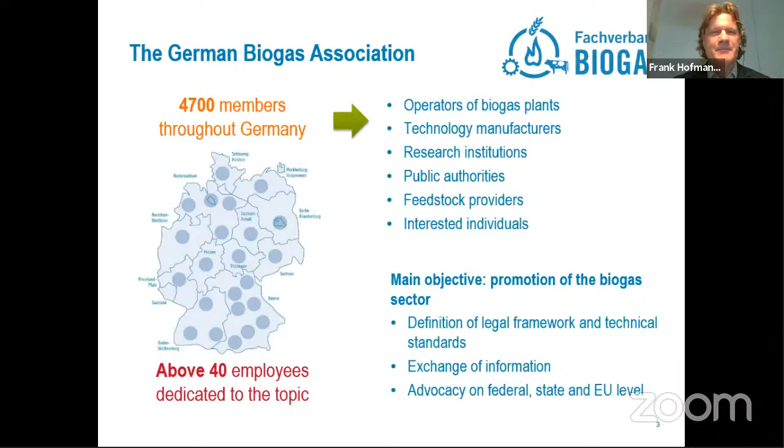I hope that we were quite successful in the past and will be in the future as well. We have an international department with about 6 persons working on international projects. Probably you know some of these organizations, for example GIZ, UNIDO, and before that there was SEQA mentioned, so we are working with all of them.

By the way, association partnership, we are very active in that. We had an association partnership with the Indian Biogas Association, with the Serbian Association, and as of today, the 1st of December, we have an association partnership with the Biogas Association in Uganda. So we are very active on that. But as it was mentioned before, I don't know exactly how active SEQA is in Latin America. But if you are interested, write me an email and then we can check that.

That's the biogas status quo and development. We thought to find out how many biogas installations are installed worldwide. By biogas installation, I must explain, I'm not talking about domestic biogas plants, so not small household biogas plants. I'm talking about the bigger size plants, industrial size biogas plants, or on agricultural level.

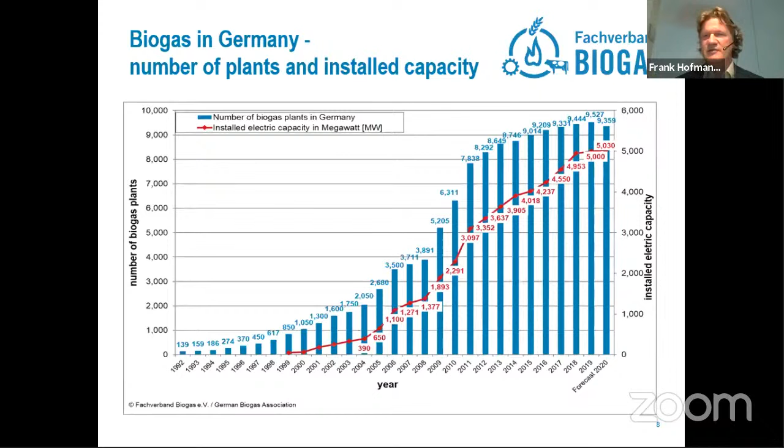It's a state-of-the-art technology. Some rough figures - I don't have time to go into all details, but what might be interesting for policymakers and society: according to official calculations in Germany, the biogas sector helps reduce about 20 million tons of CO2 emissions. Not only helps, it causes 20 million less CO2 emissions.

There's a turnover of 8.8 billion euros, which is important for policymakers as well. And job creation in the biogas sector is about 46,000 people. Again, a very strong argument for policymakers to think about the incentive system or support system for biogas. Biogas is a job creator, and the jobs are mainly in rural areas.

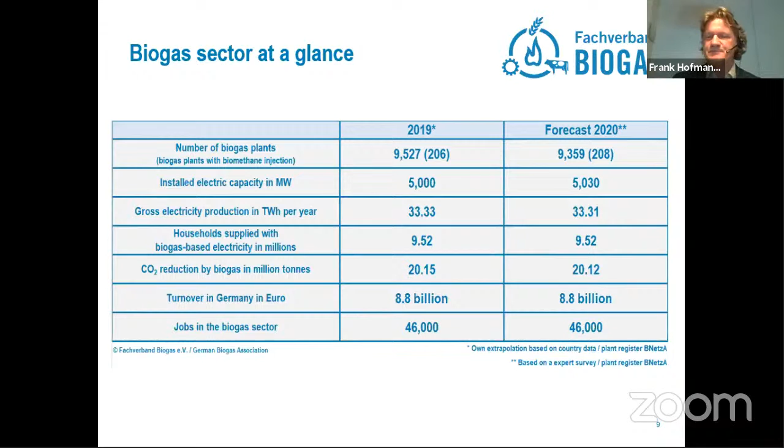Several kinds of feedstocks are usually collected. These feedstocks can be from agriculture, can be industrial feedstocks, household organic materials, from agriculture. So there are several kinds of materials that can first be collected, prepared a little bit, then pumped or transported into the main digester system.

That's usually a big tank of concrete or steel where the biogas is produced and stored typically inside the biogas plant. The biogas itself is the fuel for the renewable energy that is very often used in a gas engine to produce electricity and heat. And here it comes to the point that it's not only electricity, it's additional heat production.

Biogas can be burned directly in a boiler to produce process heat, but combination with a gas engine is typically the most common way it is done. Biogas itself could even be upgraded to natural gas quality. Then it's called biomethane. In natural gas quality, it can be used as fuel or injected into the gas grid.

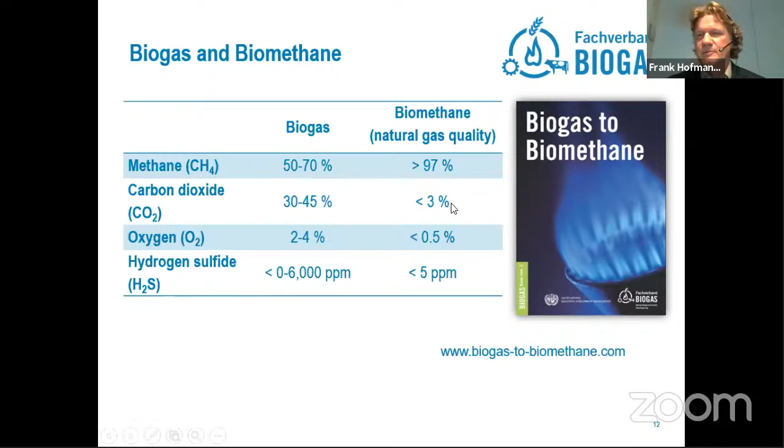The next topic where biogas is important is biowaste. In Latin America, I think waste treatment is an important topic in many countries because in former times the typical way to deal with waste was landfilling. But landfills, we all probably know, are connected with several problems or challenges.

One is methane emissions from the landfills. There are even some fires on landfills - you could imagine how much methane would emit from that. And methane is much more potent as a greenhouse gas compared to CO2. Several studies about that - maybe factor 25, 30 in this range, depending on the time frame. Anyhow, these methane emissions have a huge contribution to climate change.

Landfills have sanitization problems if people go there and try to sort out some materials that they might use. There's loss of nutrients because the nutrients are not recycled, and we have no energy generation.

What's the future way to deal with biowaste? Well, one point is composting - here we have material recycling, but no energy production. There's incineration possible - here we have energetic use of the material, but typically the ashes cannot be used as fertilizer because there might be heavy metals or other problems in there. So the ashes typically have to be dumped in landfills.

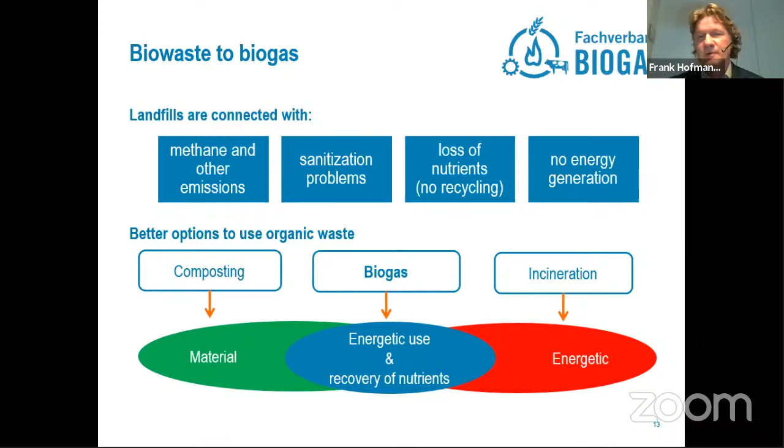Biogas can offer both energetic use - biogas production - and recovering of nutrients with fertilizer. And that's why biogas should have an important role in waste treatment.

By the way, I'm living in the city of Berlin. Here we have separated households with a brown bin or green bin, which is transported by the trucks that collect the waste to a biogas plant.

The biogas is produced, upgraded to biomethane, and the trucks collecting the waste are operated with fuel from the waste they collected. So we have two closed recycling loops: one is the recycling of material to fertilizer, and the other is taking energy from the waste to drive the trucks that collect the waste.

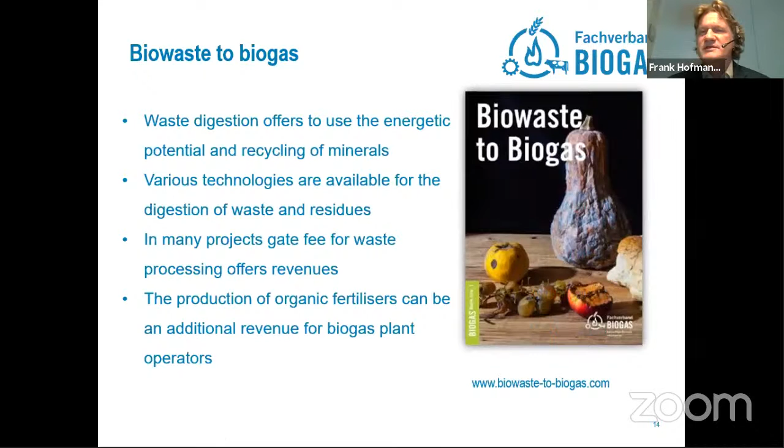There are several technologies available on the market. Again, if you're interested to get more details, we produced a brochure that might be interesting for you.

We already heard several points about grid stability today. Mr. Krauter said something about that, as did some other presenters. To make it short and focus on biogas, we had 20% renewable energy in the system.

So we will have another presentation about storage. I want to say here that in Germany, for example, we have 9,500 biogas plants. Each of them has a storage tank, and most of them—nearly or at least half—are in flexible operation, so they can produce electricity on demand if the electricity grid provider needs more electricity.

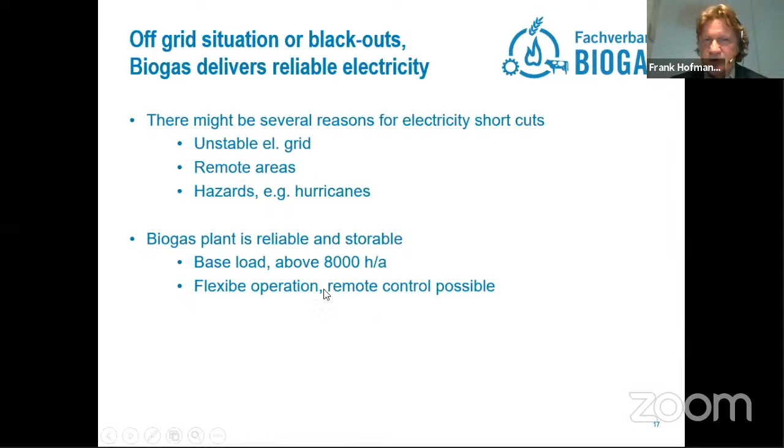This brings me to the last point of advantages of biogas. We already mentioned the greenhouse gas effect and climate change. It's a huge challenge, probably the biggest challenge of mankind. The role of biogas in this topic is a little bit special.

The most important factor of a biogas plant is probably the avoidance of uncontrolled methane emissions from open-air storages of organic material. What does this mean? In Europe it's very obvious, and for Germany it's a huge motivation to support biogas plants, because if manure is stored in agriculture, there will be huge methane emissions, which is true for Latin America as well.

In Latin America there's an additional point: industrial production of organic material and open lagoons. There are huge and many open lagoons in Latin America. You could imagine that only on the surface, the upper 5 or maybe 10 centimeters, will there be some oxygen. All the other parts of the lagoon will be free of oxygen, which means it is a form of biogas plant—there are huge methane emissions.

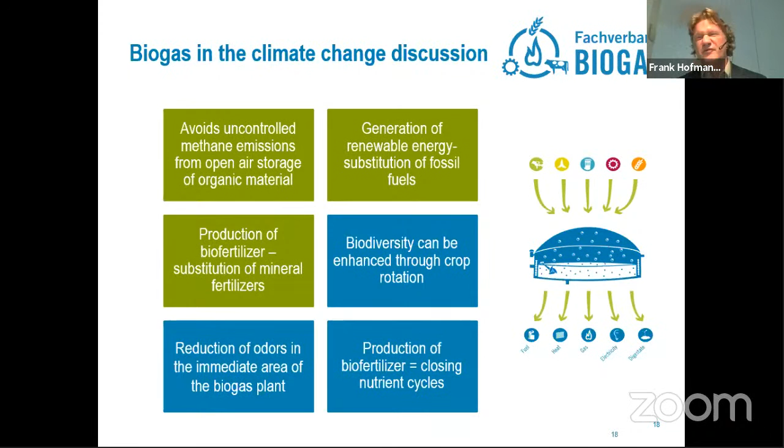Having said that, I would like to come to the end of this presentation with the summary.

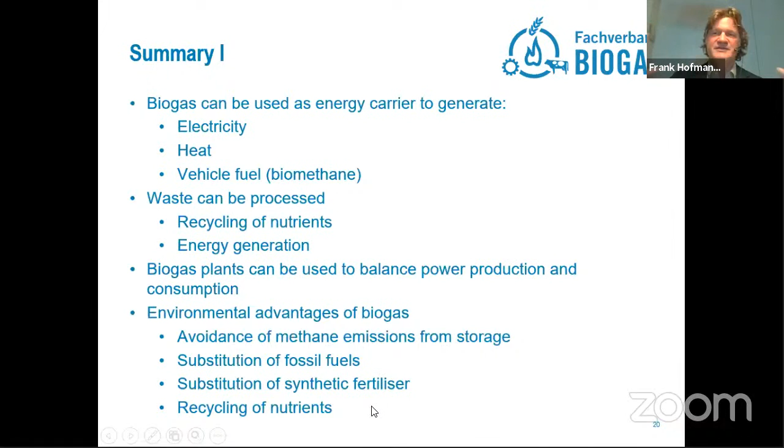Biogas can be used as an energy carrier to generate electricity, heat, and even vehicle fuel, which is somehow seldom in renewable energies. Waste is processed, recycling nutrients while generating energy. Biogas plants can balance power production and consumption, and there are huge environmental advantages: avoidance of methane emissions from storage, substitution of fossil fuels, substitution of synthetic fertilizers, and recycling of nutrients.

In Germany, we have about 9,500 biogas plants in operation, with experience since decades, so it's an approved state-of-the-art technology. If you're interested in more information, we have several publications, including two English biogas journals per year, covering topics like transferring waste to biogas, biogas to biomethane, and how to use the digestate. Safety is becoming more and more important in the world, because with development of the sector there might be a correlation with accidents that must be avoided. That's why safety and standards will be getting more important in the future.

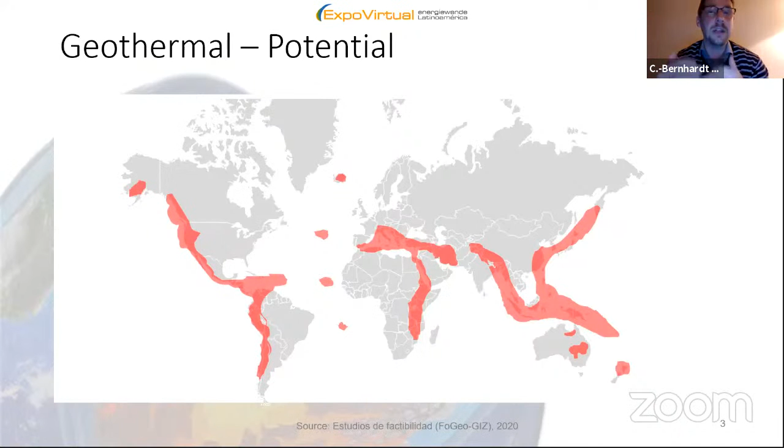Most of you know this map, I think. This is the so-called Ring of Fire. We've got a lot of seismic activity in Central and South America, so you can see here a lot of, especially in Central America, volcanoes and active volcanoes. So you see that all around the world there are some areas where you can use geothermal really easily - you can put some applications there. I picked a very famous but little country in Central America, Costa Rica. I lived there for more than 10 years, and you can see it here really well - it's well established, with a lot of analysis and a lot of data on how geothermal works in Costa Rica.

A lot of people don't know that Costa Rica has a lot of geothermal plants for electricity generation, more than 260 megawatts installed capacity, because they have more than 120 volcanoes and 10 are still active. So imagine you are there in Costa Rica on vacation, near the Arenal volcano.

You can see it here. There's a lake, a big hydro plant, and beside the lake there is the volcano Arenal. I remember when there was a little lava flow coming out at night. It's a bit romantic, but it also shows us the potential in this little country, and not all Latin America, but in most countries in Central and South America, you have really good conditions, or the best conditions, for indirect and direct use of geothermal.

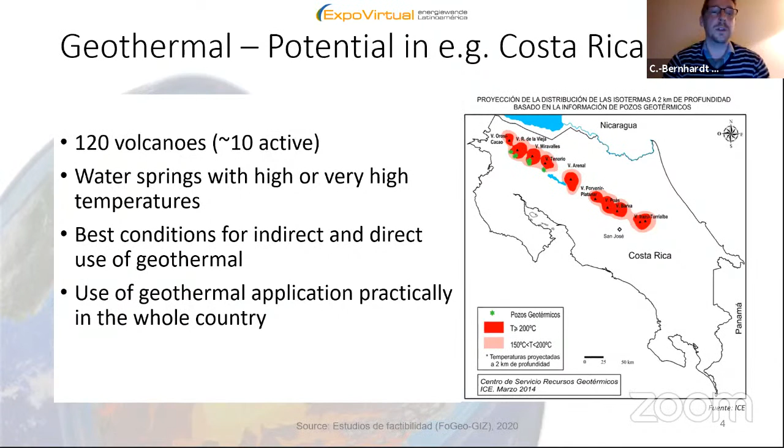This is a theme I will talk about later. Indirect use, what I mentioned, there are a lot of geothermal power plants, but my presentation will dedicate a little bit more to direct use of geothermal. So this is only for people who don't know, there's a lot of information about geothermal potential in Costa Rica. Long time ago, the ICE, the monopolist, started to investigate this kind of energy source, and it is used a lot there.

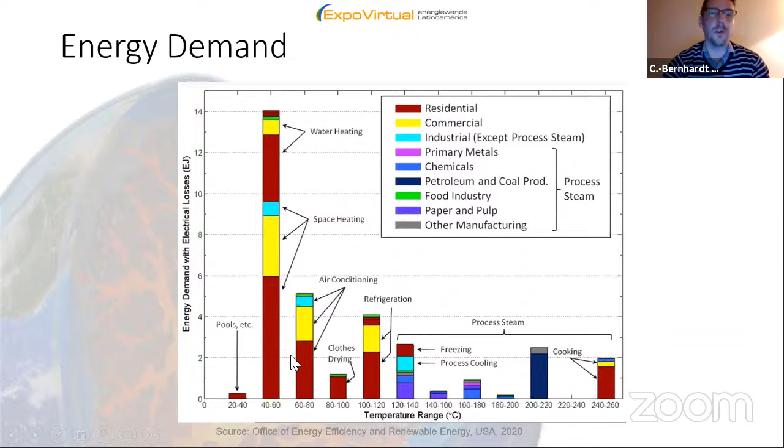So for example, the residential sector uses a lot of energy for heating water or space heating, but also air conditioning and refrigeration, and this is what is of more interest in Central and South America. Important here, if you see on the x-axis, the temperatures where we need our energy: it's between 20 for pool heating, maybe 120 for refrigeration. But I will come to this point a little bit later. Normally, you see here the most energy demand is between 40 and 60 degrees Celsius.

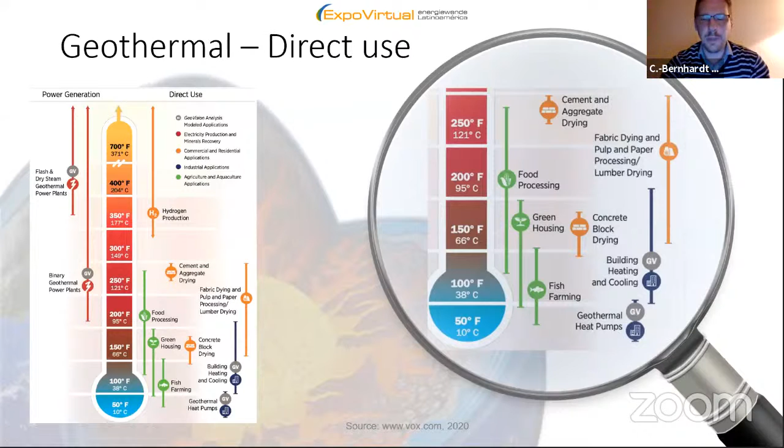And there's a big question. So, if I can use geothermal in a direct way, go back here, geothermal heat pumps for example. We have the Bundesverband Wärmepumpe, the Federal Heat Pump Association in Germany. So if you talk about it, how can it be that we have in Germany more than 1 million installed heat pumps today, and how many do we have in Central America? Zero. I think there's a big lack. The question is, maybe it doesn't work, or there is no need, or what happens here?

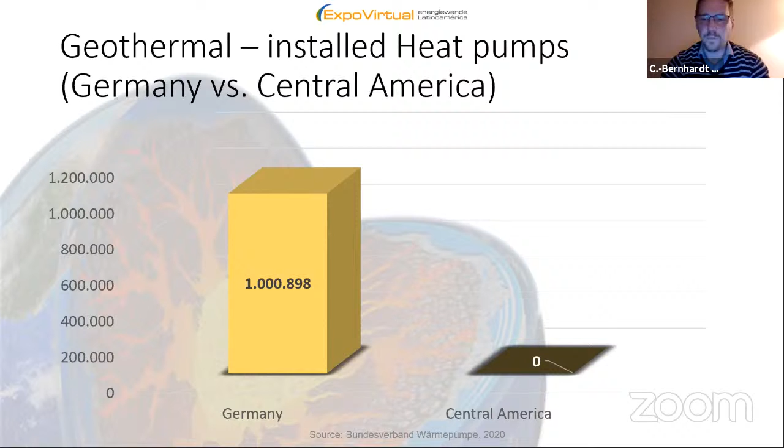I think, yes, there is a need, because you can make cooling, and I showed you in the examples with heat pumps, it's a major technology. You have a lot of applications for it, and there are some examples in South America, but until now, no example in Central America. So what are my projections? For the next 10 years, to have a little vision of where we can go with geothermal applications, especially heat pumps, in the next 10 years, I think we can achieve more than 1,000 installations.

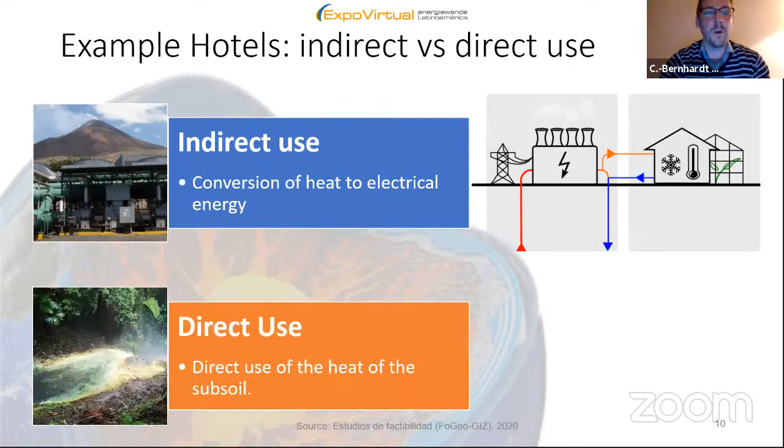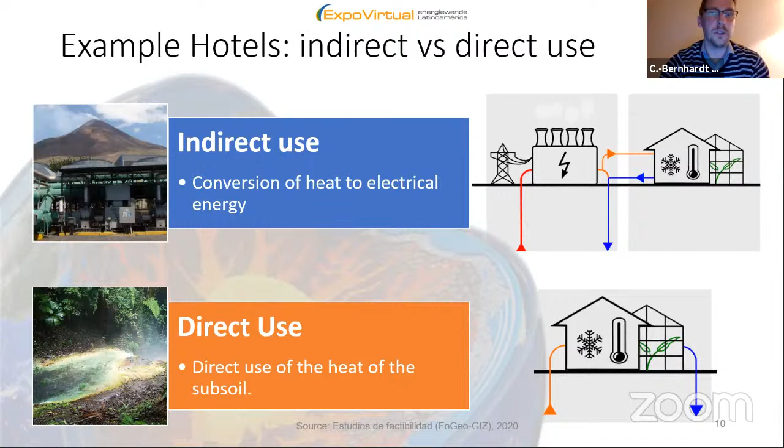So next, some ideas how you can use geothermal applications in hotels. Indirect use, we talked about it, from heat to electricity, or the direct use, especially using the heat of the subsoil for certain energy needs in your hotel.

Also, where's the biggest energy demand in a hotel? Normally, it's from the air conditioning in Central America and also in South America. Sometimes it's up to 40% of the whole energy demand, and what you are paying monthly, so the energy is dedicated to air conditioning.

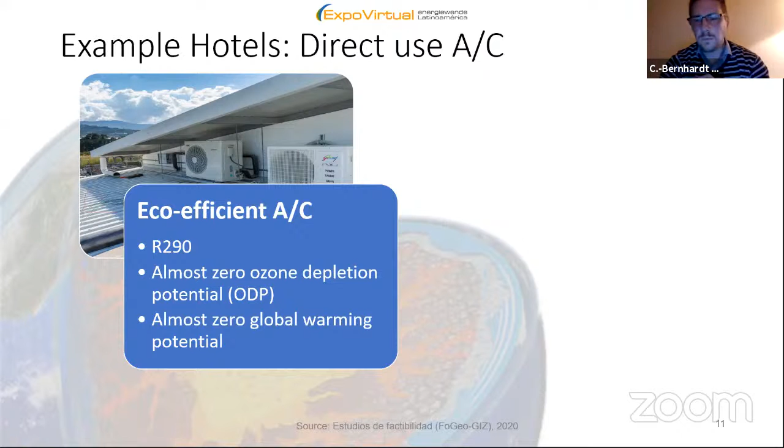There's also the possibility to replace it, to make a change, to use only the electricity you're used to, and use a heat pump with inverse technology. Then it works like a refrigerator, so you can use geothermal energy also for cooling.

Here are some other examples for hotels with direct use, for example in a sauna or other wellness and health applications in a hotel. Here you need a bit more temperature, maybe 70 to 90 degrees. Where you need higher temperatures, it's easier to recover your investment in a geothermal application.

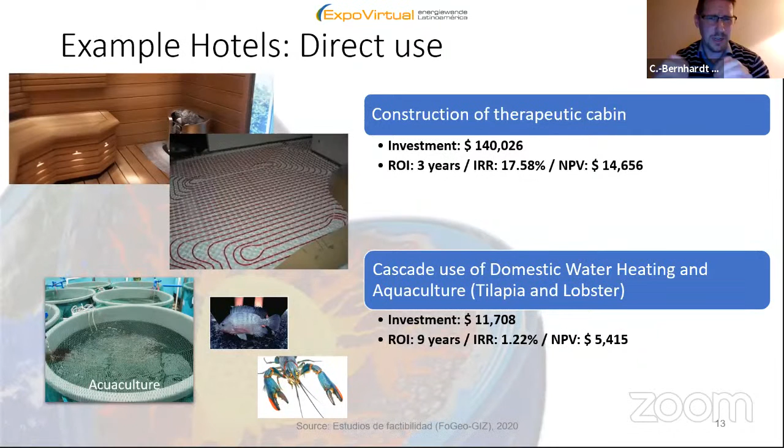It's just some pictures. If you take such a therapeutic cabin, a sauna, maybe an investment of $140,000, you get a return on investment in more or less 3 years. This is really easy because of the high temperatures you need here.

Another application I want to show you is greenhousing. We are really used to it here in Europe - you see it in the Netherlands, in Germany, in Turkey. This is an example from Turkey, where the heating of the greenhouse is also done by a geothermal application.

What does it mean, or why should I do this? Of course it helps me be more efficient. It's cheaper, and I can grow my plants more or less the whole year, so I'm independent of outside weather conditions. I've got a more secure and efficient environment for my plants.

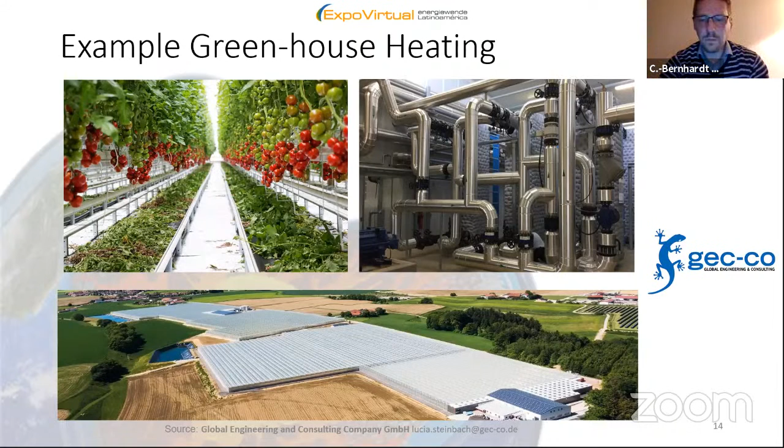Another option I mentioned before is cooling of buildings. There's a big market opportunity for Central America. If you use groundwater and heat pump technology, you can use it for your AC. I'm thinking, for example, about Panama - Panama is like a big fridge, it's on sea level, Panama City is a city on sea level, it's really hot there the whole year, and they use air conditioning 24/7.

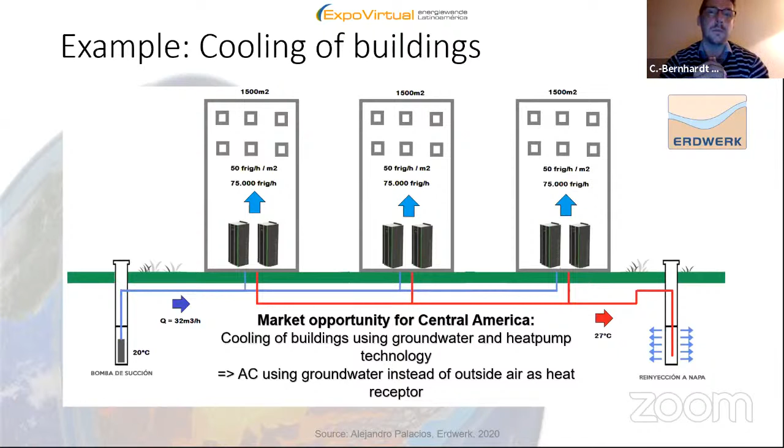Here's an option you could use to replace your normal ACs, maybe together with heat pump technology, another cooling option. What does it mean?

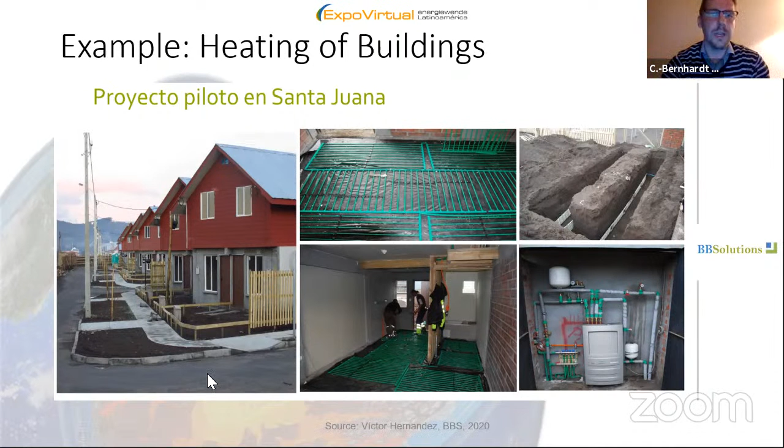Another example of heating buildings, which we know very well here in Germany, but this example is from Chile. A few years ago they installed a really nice system for a social housing or living area. The heat pump works really well, and you can see there is a lot of gain in efficiency using a heat pump and geothermal application for heating a building.

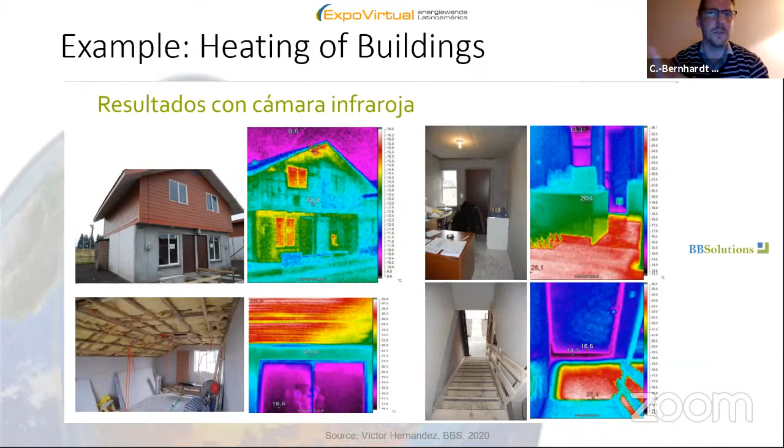We have got 1 million heat pumps installed in Germany. Why is there none in Central America? I think there's a lack of ideas and knowledge, but later on I will tell you a little more about why this happened.

Last but not least, there are some real examples of geothermal application in South America - for example, heating a pool at a Navy base, also greenhouses as I mentioned before, or fish farming. And of course, in whole food factories they need a lot of energy, a lot of heat, hot water - there are already companies using geothermal in their production.

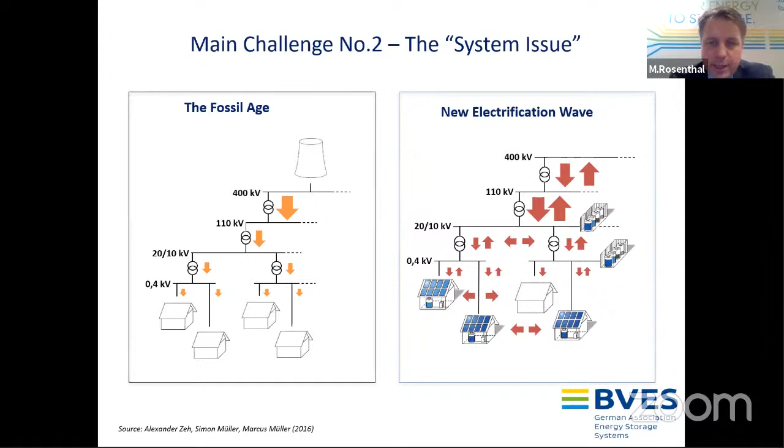And energy storage starts to play a huge role, because we recently had a tweet from our minister for energy who said the sun is not shining in the night - unfortunately we saw it a bit too late, otherwise we would have replied. But you can have energy storage in the night, and that is, of course, the new thing which is now happening.

In the fossil age, energy was sufficient. You needed energy, and then you could drive a car, use the heating, produce goods in the industry. What we need now in the new energy world is power.

That's always a slightly tricky word. Those coming from an energy background know exactly what it means. For those who don't have this background, power means that the energy is available when it is needed. For instance, if you have an electric car and you want to load it, if you have power in the sense we mean here, this car will be charged within 15 minutes, and then it will be full.

One of our members is BP, which you possibly know from other cars and petrol stations, but BP is now the big name in the ultra speed charging sector, and they produce exactly those charging stations which allow you to charge your car within 15 minutes. And that's a new thing - the energy is there, available when it is needed.

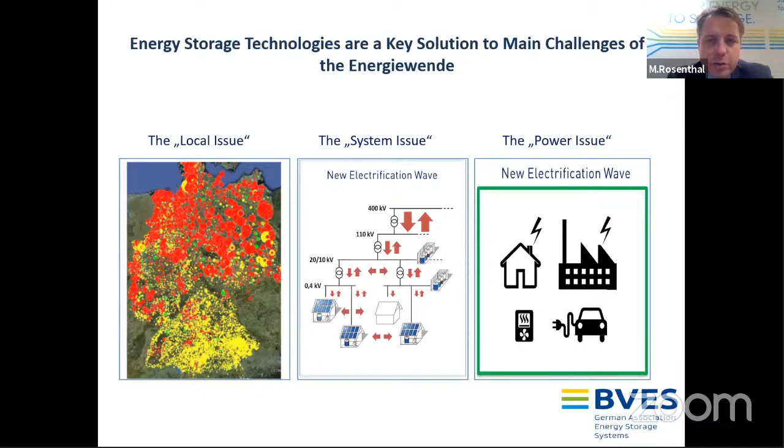So this is a summary of what I talked about. We have the local issues, the systemic issues, and the power issues, which are all changing. And now I come to our favorite picture.

So if you, for instance, want to increase your energy efficiency in terms of always having a proper frequency, then you use energy storage. That's a tool to secure that your energy efficiency and frequency control is always stable. And that's how it works.

We do have some debates with our national government about what energy storage should and could be doing. Our government has a very limited approach to energy storage. What's interesting is because we have a multi-level governance system, and the European Union is pooling the power of now 27 member states - Britain is still part of it, so it's 28, but that's going to end this year - at the EU level, there's a very clear policy saying energy storage is key for cost-effective security of supply.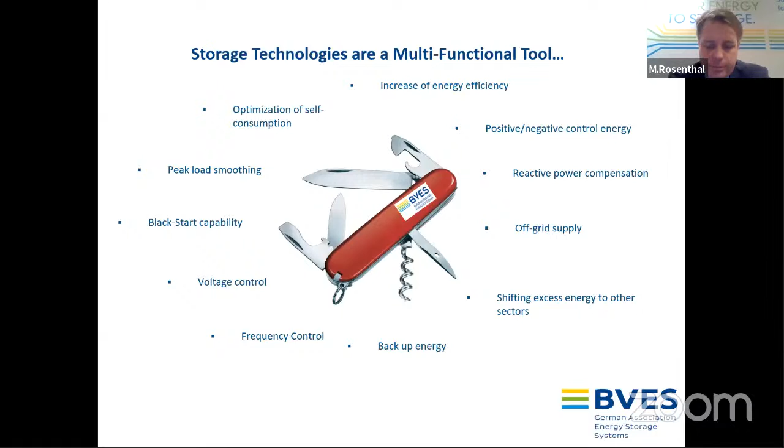But the main pillars are lithium ion. We know this from car batteries or electric vehicles, quite common. You possibly also know it from your mobile phone. That's also what our politicians understand - that's a special way of energy storage.

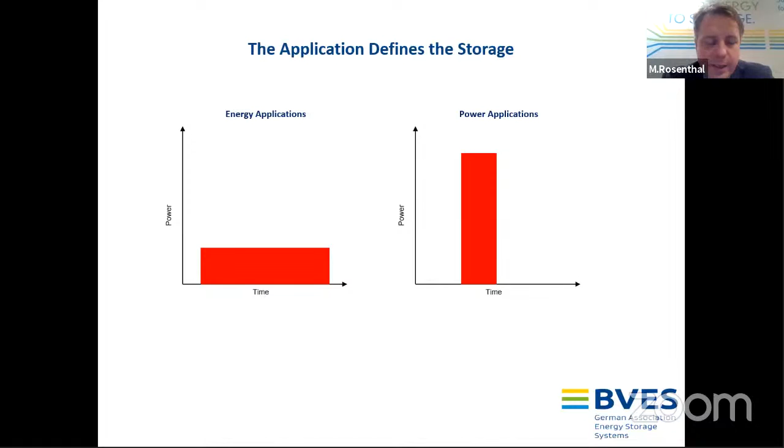And the key message is that there is a huge flexibility - you can use whatever technology is helpful for you. So now we go to the current trends and developments. I also mentioned a few of the technologies - these are nice, lovely pictures of how it could be, how it could look like.

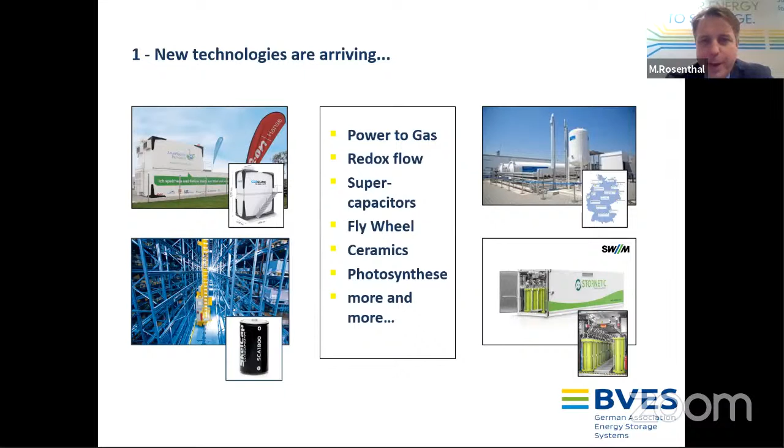What we're seeing nowadays, and I think this is a nice picture illustrating, is that the combination of technologies is very common, and you also have cross-sectoral integration. So the car could be used, for instance, if there's still energy in the car and you come home with it, you can plug it into the household plug, and then use the energy from the car for the house.

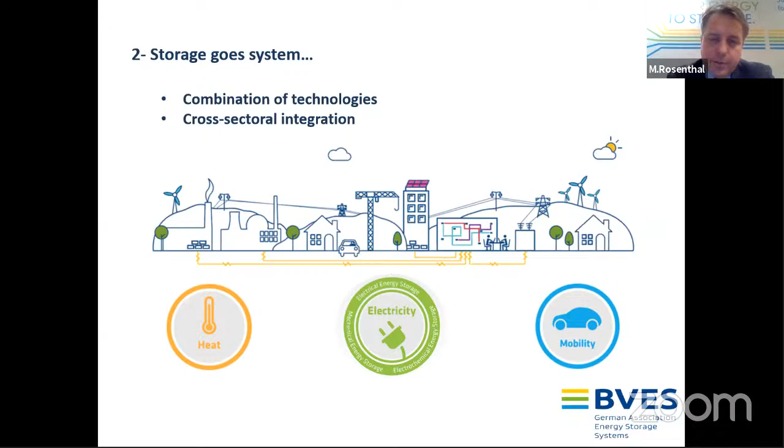Some of you may think that doesn't really sound feasible, but the car industry - we are in talks with BMW and Daimler - is very focused on it because they see the potential of a new market for cars in terms of not only taking energy, but also acting as a rolling battery, which charges, for instance, at the workplace, and then you use the remaining energy for your home. So this is the new world where everything is interplaying, and it's a slightly better world than what we have now in terms of energy.

This picture was drawn by my colleague, an engineer who is very focused on getting things right. What I like about this slide is it gives a clear message about electricity from renewable energy in future being used for power to heat. So heating will be based on electricity, and also mobility will be based on electricity. This also means hydrogen is going to be used, and hydrogen is also going to be dependent on electricity. What I find important is it doesn't need to be electricity when it comes to the final user, it can also be gas, which comes to the final user, and he can use what he needs. But electricity is definitely, from our point of view, the key for the whole system, or for the change in the whole system.

I just want to add a few words about the German regulatory environment I mentioned at the beginning. I don't want to bore you too much, but we did an opinion poll amongst our members, and 86% of them say the regulatory framework is stopping our business. The reason is the German government, unfortunately not alone in Europe, but as the leading nation in this area, is defining energy storage as a form of last usage of power.

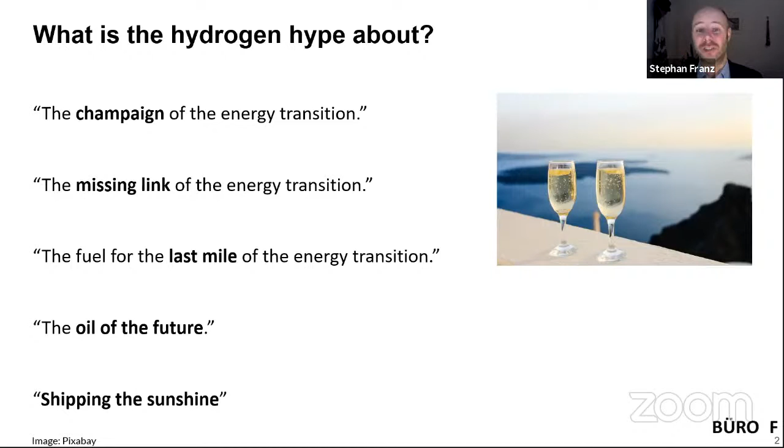So let's start with a basic introduction to hydrogen. It's very basic, we all know it from chemistry classes. It is the lightest element in the periodic table. It is here on the upper left, the first element.

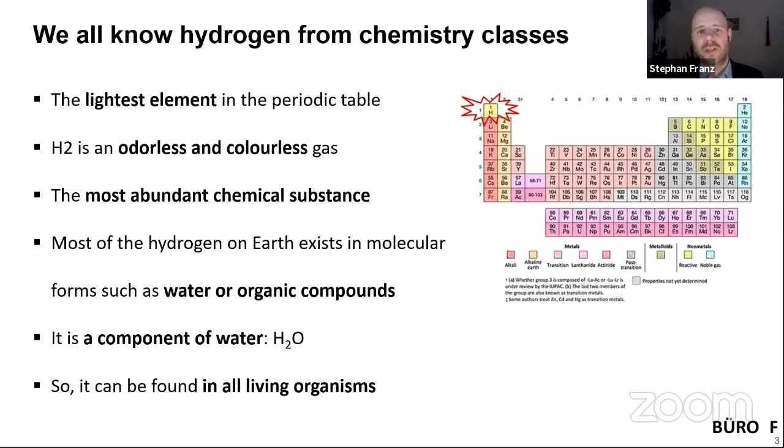It is an odorless and colorless gas and the most abundant chemical substance in the universe, not in the Earth's crust. Here it can be found in compounds. And this is important: hydrogen is always found in composites, in compounds, like water, which is hydrogen plus oxygen. So it can be found in all living organisms, it's nature.

It is already used as gray hydrogen, which I will explain on the next slide, in the chemical industry for producing ammonia, polymers, and other basic materials, in the petrochemical industry, in refineries for hydrocracking, and in other industrial segments as well, for example for producing glass.

World demand in 2015, and it has grown a little bit but it's basically the same figure for 2020, was about 8 exajoules and 2,200 terawatt hours. Just for comparison, the German power market, the electricity generation of Germany, is about 600 terawatt hours. So it's, let's say, 3 to 4 times the power market of Germany.

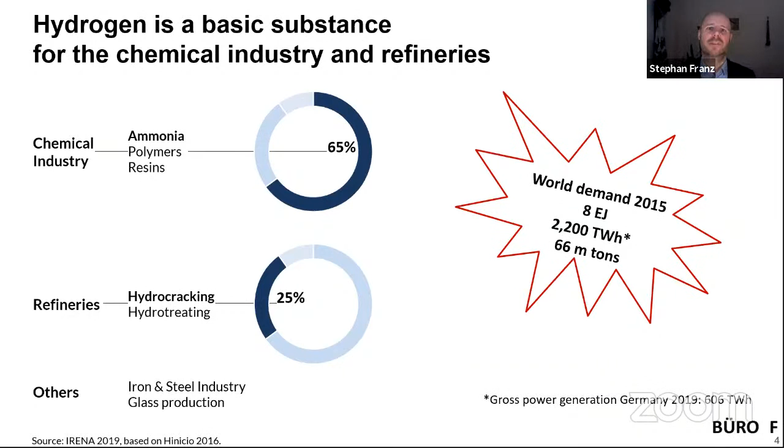So there is a substantial world market for hydrogen already, which is covered by gray hydrogen. Gray hydrogen is produced by a steam methane reformation process using methane. This is the most common way to produce hydrogen nowadays. Another way could be using petroleum, or petrol, oil, and coal as well.

So the magic is green hydrogen now. With the costs having come down, or lowered cost for wind power production and photovoltaic production, the idea is to use electrolysis to separate oxygen and hydrogen from water molecules. So you need renewable electricity — to make it green hydrogen, it should be renewable electricity used to produce hydrogen and oxygen, and there is some process heat that could be used as well. So this is the magic of wind gas, of green gas — not only decarbonizing the power sector, but also decarbonizing all energy sectors.

Green hydrogen is a niche market at the moment. Only 4% of global hydrogen demand is covered through green hydrogen, and it's much more expensive right now. Gray hydrogen costs around €1.50 per kilogram, and green hydrogen is between 5 to 7 euros per kilogram right now in Europe. In Chile, they expect to have the cheapest hydrogen in the world by 2030, reaching the €1.50 range — which would be very good news — between 1.3 to 1.8 US dollars per kilogram by 2030. This is one of the objectives of the Chilean hydrogen strategy. So we see, if there is competitiveness of green hydrogen to conventional hydrogen, there is already a market.

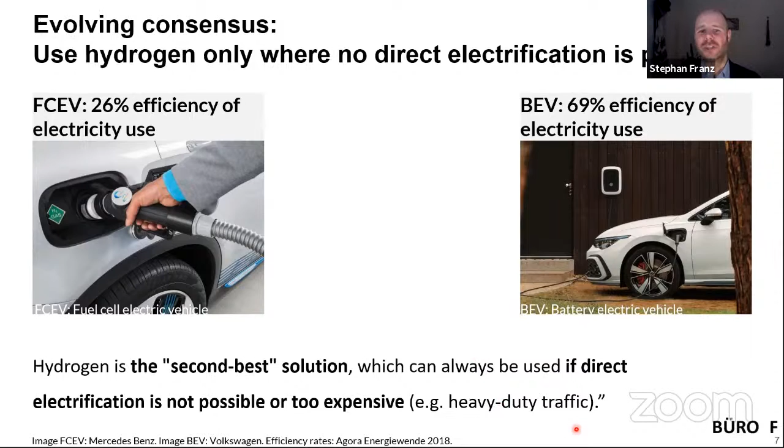So in the end, we have, for example, for a fuel cell electric vehicle, an efficiency of 26% from the kilowatt hour of generated wind power or photovoltaic power to the moving wheel of the vehicle. And in battery electric vehicles, BEV, it's 69% — from well to wheel, meaning from generation to final use in the fossil world. So there is no case for an efficient, energy-efficient use of fuel cell electric vehicles. Sorry to say this, but lithium-ion is much better. But then in heavy duty traffic, there might be business cases for hydrogen. So where do we need green hydrogen?

First, it's obvious: decarbonize the existing hydrogen demand, ammonia production, usage in refineries. This is where all the strategies are targeting right now. This will be the first use case for green hydrogen.

There's a lot of talk about new industrial production processes here in Germany, especially in the steel industry - direct reduction instead of blast furnace. This is a very relevant sector here in Germany because the steel industry makes up some 6 to 7% of German greenhouse gas emissions. So why not start with the 4 or 5 companies and make their production process cleaner with green hydrogen?

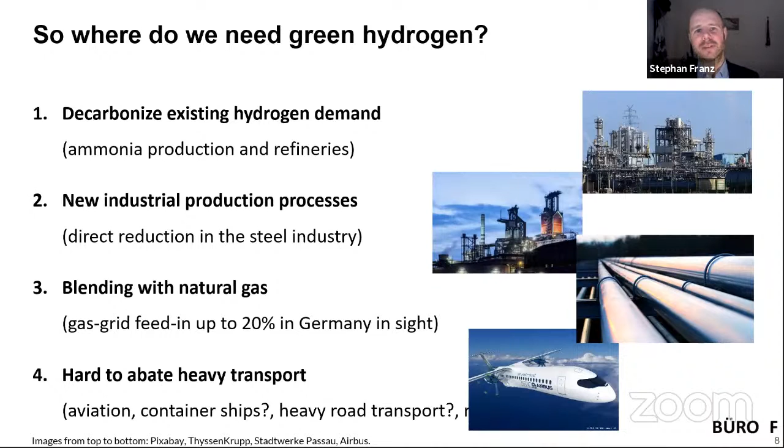Blending with natural gas would be another option to feed green hydrogen into the existing natural gas infrastructure. Then comes the transport sector, the hard to abate heavy transport - aviation, maybe container ships, maybe heavy road transport. Airbus announced it will come out with a hydrogen or zero emission airplane by 2035. This is a very interesting segment because we don't know how to decarbonize the aviation sector, and this is where hydrogen comes in. Big industry and then big transport, but not the fuel cell electric vehicle passenger car - this is for playing right now.

And of course, for large scale storage in the power sector - we had the presentation of Mr. Rosenthal previously. Lithium-based batteries are good for storing seconds, minutes, hours, maybe days. The largest battery right now is, I think, in Australia, 120 megawatt hours of storage capacity - a big lithium-ion battery storage. However, for months and weeks, hydrogen comes in.

If you need it - we have dark doldrums here in Germany where there's no sunshine, no wind for 1-2 weeks. So an energy system, a power system highly dependent on intermittent renewable energies requires some backup, which could be hydrogen for the dark winter months that we are experiencing here. So this is another use case for hydrogen, maybe in the power sector. But we should start with decarbonizing existing hydrogen demand, inventing or using new production processes, and then go to the transport sector and maybe the power sector.

And there are a lot of opportunities, especially for Latin America, I would say. There are some initiatives already going on - I mentioned the Chilean hydrogen strategy already. There are 2 projects already in development in Chile, one in the south.

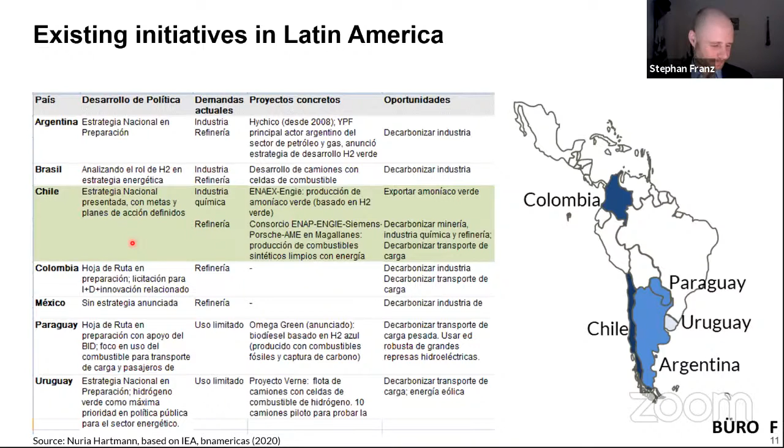Coming back to Chile, the recently published hydrogen strategy focuses on the production of ammonia and the usage of green hydrogen in oil refineries in the coming years. But in the long run, Chile wants to export ammonia and hydrogen, and this is the big market: first decarbonize existing hydrogen demand, and then look where to export hydrogen and its following products like ammonia, like synthetic fuels in the coming future.

However, we saw the cost of green hydrogen in the beginning. So I think it is important to be realistic and say, okay, maybe an international hydrogen market might evolve from 2030 on. Right now is the time to bring down the cost. Right now is maybe like the 1990s - the 20s might become what the 1990s were for photovoltaics and maybe wind power. So we are in the phase of bringing down costs and identifying good use cases for green hydrogen.

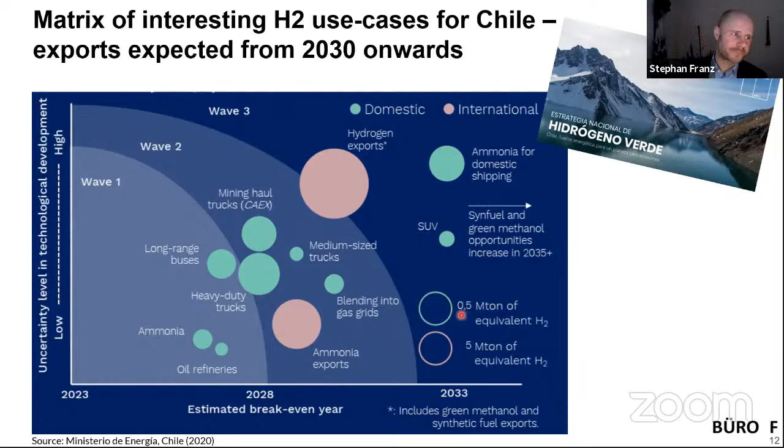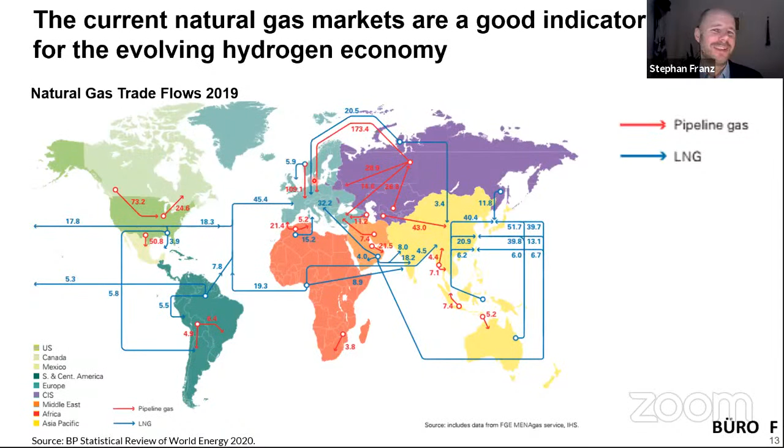And for shipments, larger distances might become viable. It's of course best to have a regional supply of hydrogen, but as we are lacking surfaces in place here in Europe, we need to import hydrogen. This is where shipments might come in for longer distances.

The shipment is not the problem, the kilometers are not the problem. It's more the process of liquefying hydrogen, because it liquefies at minus 250 degrees, so maybe it's better to ship ammonia instead. There's a lot of uncertainty still about what will be the technical solution for the future hydrogen economy. However, some considerations are being made at the moment, and it is evolving, maybe in a couple of years.

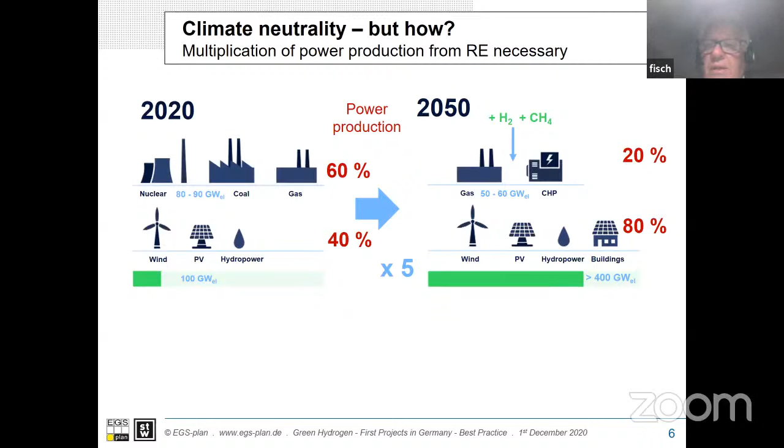So, hydrogen. We started 5 years ago on projects linked to hydrogen, to green hydrogen. And of course, it was mentioned before, I think it's boring by now: green hydrogen is a key element for long-term storage, as well as for sector coupling between electricity, mobility, and industry.

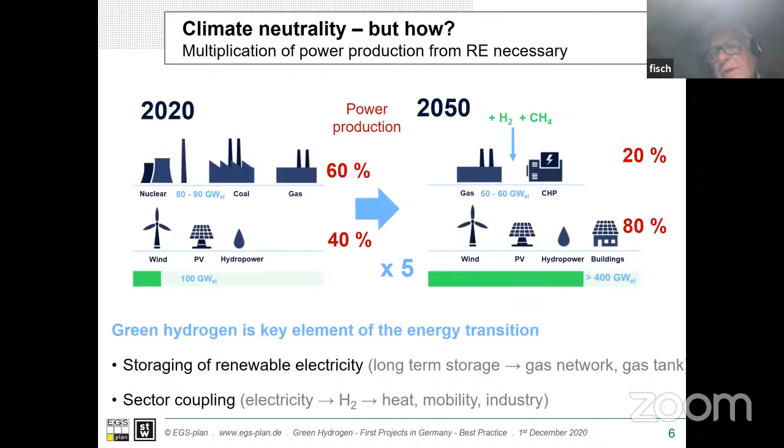Heat, I will mention, because why heat? I will come back to how we increase the efficiency of electrolysis from actually 65 - it's not 70, by the way, it's 60 to 65 - up to 90. But this is only if you're using the exhaust heat of the electrolysis. So this is, in my opinion, how our electricity consumption and the installation of renewables will need to increase to reach our goals.

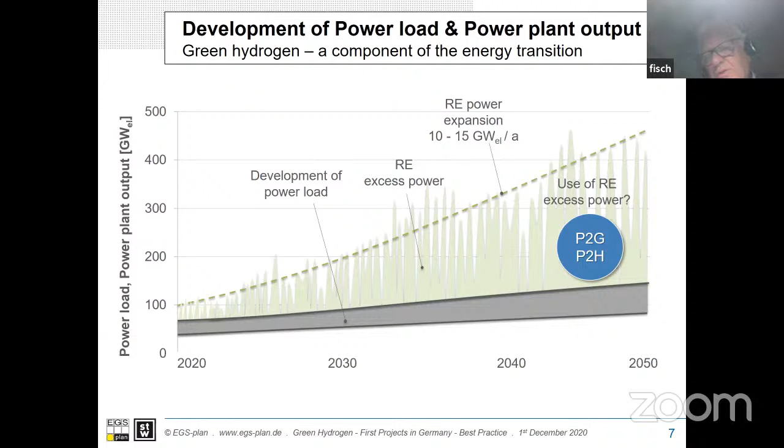And you see that we get a lot of power that could not be used, so we have to transfer it to another energy form. Some studies, not from us, coming out in recent months, mentioned that if you would like to reach 95% climate neutrality in Germany, then we need 20 gigawatts of electrolysis by 2030, and 150 gigawatts by 2050.

Let me say this way: at the moment we have nearly nothing installed, just some megawatts. Also, our projects are in the region of 1 to 5 megawatts. This is nearly nothing. But the goal of Germany, by the government's national hydrogen strategy, is to install 5 gigawatts by 2030. But as I said, if you would like to reach 95% climate neutral, you need more than 4 times that.

But still, we don't have the production lines, also not in Europe. Some companies are now thinking about that, very well known ones like Siemens and Nel and so on. All of them are our clients, or we are customers of them.

So the German strategy, as I said, was announced this year, and 5 gigawatts should be built by 2030. But as I said, it's actually several thousand times higher than what we are doing in our projects. This is really interesting, but we need very urgent production lines who can produce that. And openly spoken, I would not like to import these products from China. So the government has put 7 billion euros for national projects and 2 billion for projects outside of Germany.

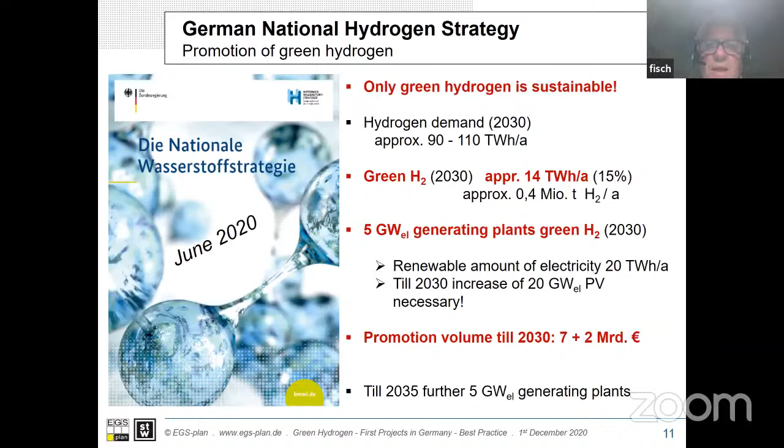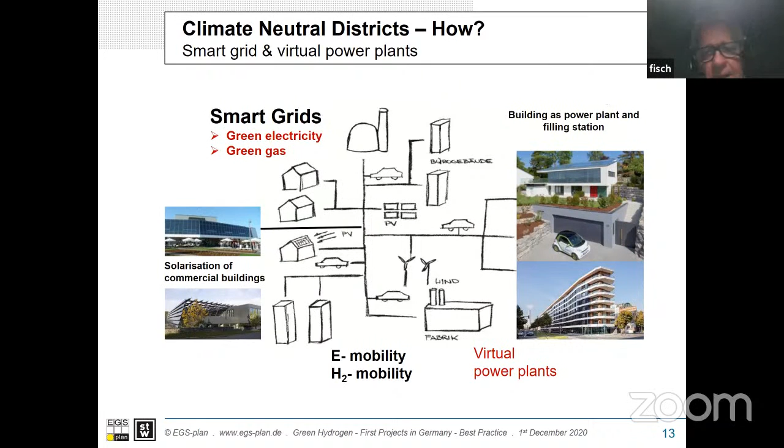Okay, coming to our projects. Our projects, for maybe 5, 6, 7 years, we call smart grids and smart districts. And our definition for climate neutral - you have to have a definition.

Our definition is 1 ton CO2 per person per year, including mobility, for a district or city part. We pushed our Ministry of Economy to establish, nearly 5 years ago, a program called Energy Efficient Cities, and we won 2 of them. One is in the north of Germany, close to Hamburg, and another one is close to Stuttgart, where I'm living.

It's our project, our lighthouse project called Esslingen. Both are under construction and nearly finished. I would like to tell you only about one of them, this one in Esslingen.

Due to the time lag, I would like to explain a bit more about these real projects. This is a city close to Stuttgart with nearly 100,000 inhabitants. In the center of the city, a new district is planned and under construction with nearly 500 dwellings on a very compact city construction. It's not single family houses, it's really a city part.

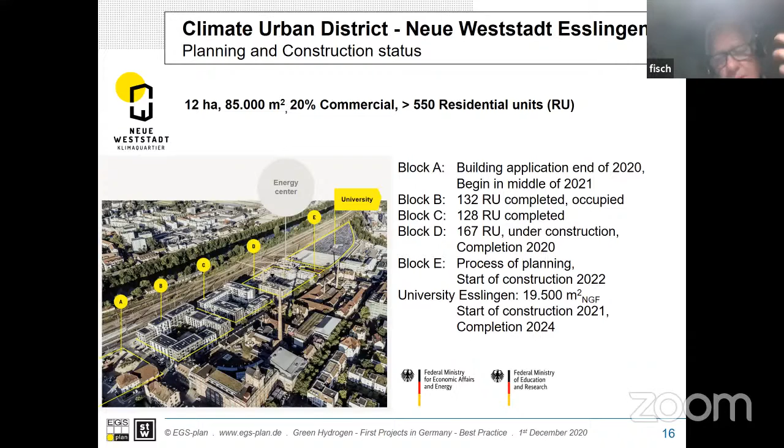Now I'll explain why we are increasing the efficiency of electrolysis from nearly 60% to 90%. We're using as much as possible local electricity from our roof. We call it the solarization, the maximum solarization of buildings.

By the way, nearly 10 years ago I shifted from solar thermal totally to solar electricity by PV, because in the 90s, last century, I built the biggest solar city projects with solar thermal and seasonal storage in Germany. But we only built 5 or 6 really huge seasonal storage systems. Then it's not focused on anymore, because the gas price and all these other prices killed our projects from the economy point of view.

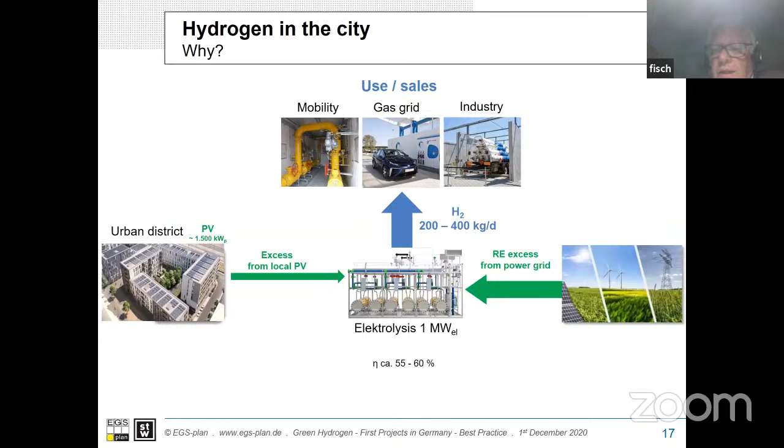So this renewable electricity we're using in electrolysis with a PEM or an alkali electrolyzer. This isn't important because both technologies are well established, and the real efficiency, including cleaning and dehumidifying the hydrogen, comes up to 55 to 60%. This is the value actual in the industry, maybe some percent better, but that doesn't matter in the discussion. So this 1 megawatt we installed there in Esslingen in the city part is producing...

...nearly 400 kilogram green hydrogen per day, nearly 80 ton per year. We're using this hydrogen in the gas grid. There is some mixing, and some of it we are transporting to the industry. And we're using the heat, because we have exhaust heat.

Low temperature electrolyzers have nearly 60 degrees centigrade exhaust, 30% of the incoming electricity, and we're using this heat for the space heating and domestic hot water of the district. This is the reason we are so close to the city part.

By the way, if you would like to install all these electrolyzers in Europe, or in Germany for the demand I mentioned before, then the excess heat of all these electrolyzers is nearly equal to the actual district heating consumption in Germany, nearly 120 terawatt hours. So this is one reason I recommend doing these electrolysis projects in Europe.

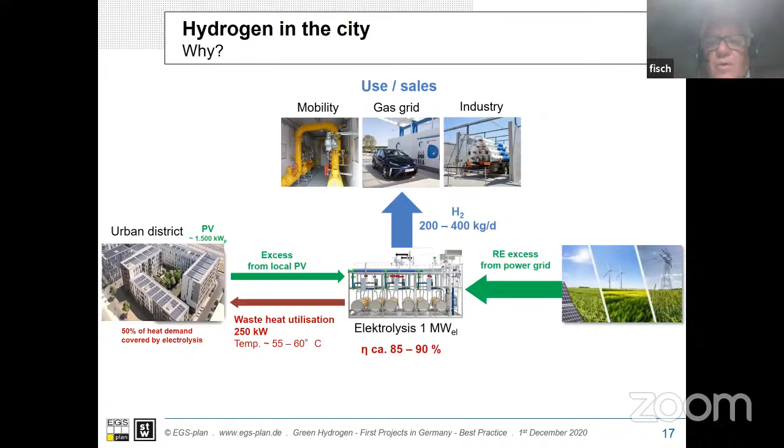So we have done this in this city part. You see here the solarization - we put as much as possible high efficient PV on the roofs, on these flat roofs. This is typically designed in Germany, that these buildings have flat roofs in these more or less multi-family buildings.

So this is the actual site, the sites a half year ago. You see we have our electrolysis directly in the city. It took us nearly 1 year for the permission, but it works fine. Now we know how we do it, and now we copy it on several other projects.

You see there the heat is distributed from this energy center, and then we have a hydrogen pipeline to the conventional gas pipeline, and we feed into the gas pipe nearly 3 to 4% of the amount of methane we can insert into this gas pipeline.

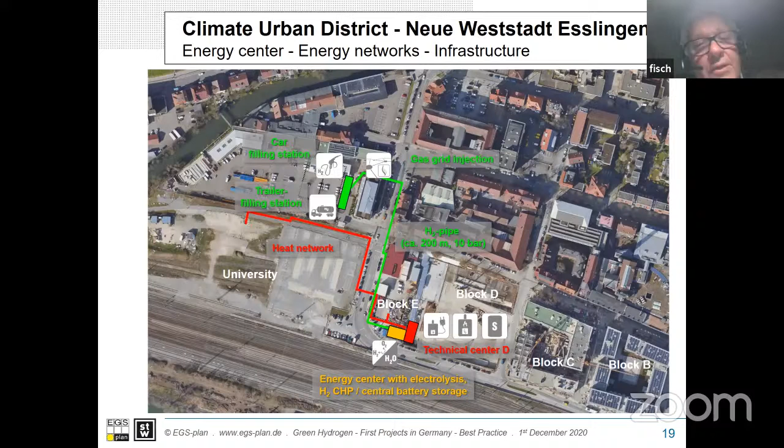And another part is we have a trailer filling station where we compress the hydrogen coming from the electrolysis with 10 bar up to 500 bar, and then it's transported by conventional trailer. At the moment, let's say 99% of all hydrogen, green or gray, is transported by trailers, by high pressure.

In this area where you see this car filling station, there will be a new district where we're installing a complete hydrogen network, a distribution network where only hydrogen is the carrier. At the end of this new district we may be using fuel cells as well, it's still in discussion.

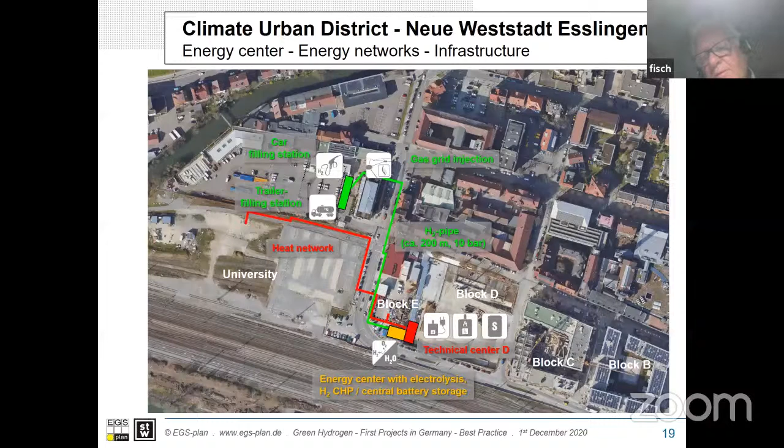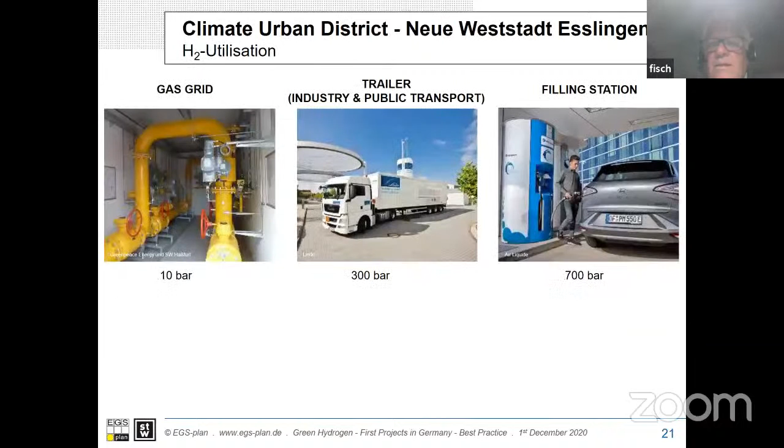I would not like to bore you with all the technical things, because this is what we engineers do, a lot of designing and costs. This is our technology. Let's talk a little about cost, because I saw some figures before about what a kilogram of green hydrogen costs.

The main topic is not the capex, the main topic is the electricity we're using for power to gas. When we go into Chile with 3 cents per kilowatt hour, you can produce hydrogen in the range of about €3 per kilogram. Then transported to Europe, maybe you have 4.5 to 5 euro per kilogram.

But we have to know that when we build huge PV systems here in south of Europe or in Germany, then we come down. Actually in Germany it's 5 cents - the electricity from big huge PV plants is nearly 4.5 to 5 cents.

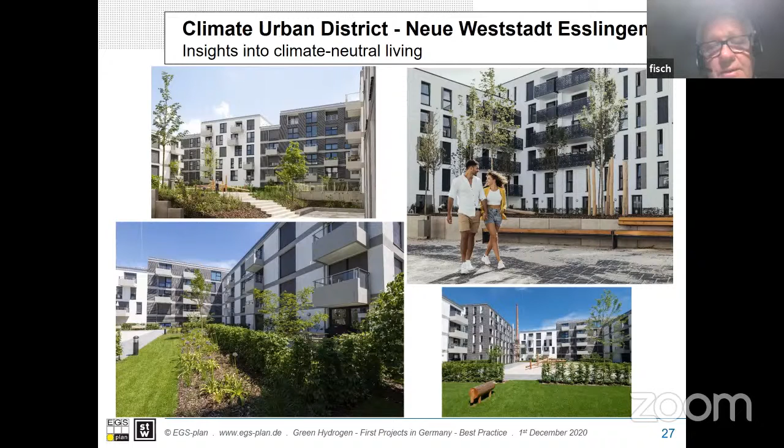I'll give you one idea of what we're doing. There's a lot of projects at the moment - we're doing 6 or 7 projects in this case. One nice project I'd like to show you what's happening.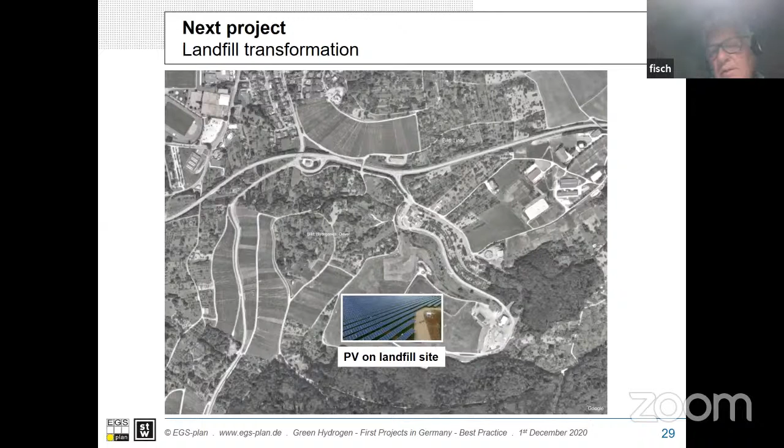We have a lot of so-called landfills or garbage deposits that have been covered in recent years by soil, and we're using these areas for installing PV, some megawatts, from 5 to 10 megawatt PV. Now a project has come up where they're using the gas from this garbage, but no more useful gas is coming, and the cogeneration is no longer in operation.

So now we're installing electrolysis there, because the PV we're installing on this plant, on this area, we can directly produce hydrogen and feed the excess heat into the pipelines for the city.

On this site we transport the hydrogen with trailers to the industry, because in Germany we now have Daimler and Bosch installing new production plants for fuel cells for trucks, especially for trucks, because as my previous speaker told you, for cars, normal small cars, electricity is of course the solution.

But for trucks I cannot understand people saying that a 40-ton truck needs an 8-ton battery. We have to also consider that a lot of CO2 is stored in these batteries, and this is the story where I see no application for electricity for heavy trucks or ships or whatever.

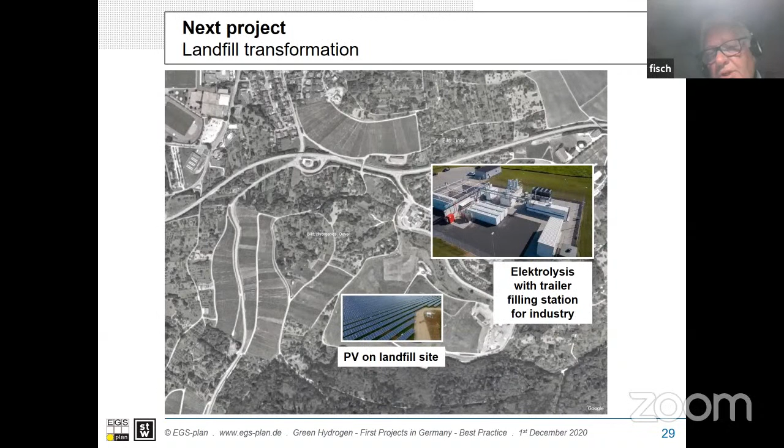This is a project that's going on now - the installation of the PV, and here is the plant where the electrolysis will be operated. I'm very happy to have these projects, and now for our conclusions.

I think I skipped that, and I would like to say: doing, not speaking too much - doing. Thank you.

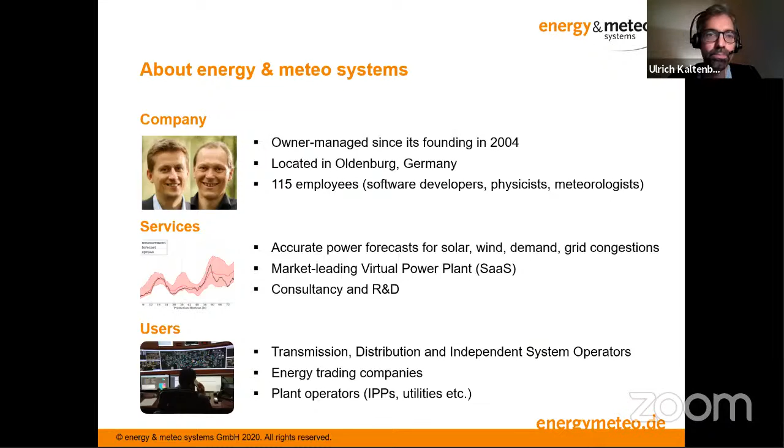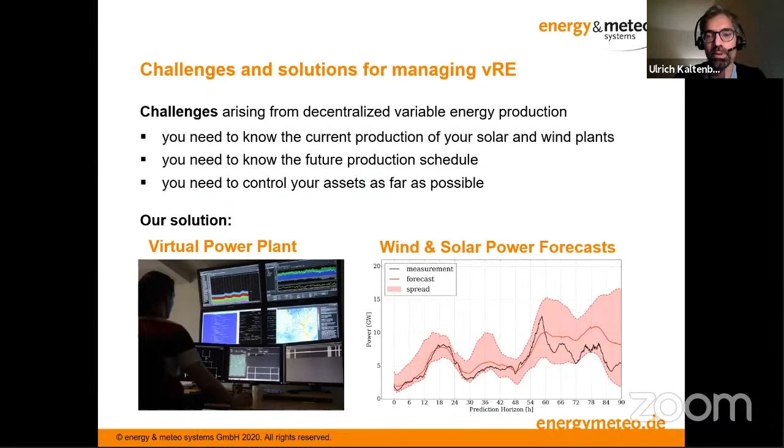So I'll start a little bit with forecasts, power forecasts. Here is an example of our Suncast solar power forecasting system, to give you a basic idea of how solar power forecasts and also wind power forecasts are created.

Basically we choose different numerical weather models from weather forecast providers and combine these according to specific sites. So if you want to forecast a specific solar power plant, we look at the different weather models which cover this specific site. There are weather models which cover every site on Earth, every spot. So we try to achieve an optimal combination of different weather models.

Then we need from the plant owner or grid operator precise information on the plants we want to forecast - this could be the installed capacity of the solar plant, the inclination angle of the modules, whether there's a tracking mode or a fixed mounting structure, and so on. Based on all of this information, our forecasting system calibrates a forecast which is then delivered to our customers. Ideally, we can calibrate this forecast with one year of historical measurement data. This helps us train our forecasting model right from the beginning.

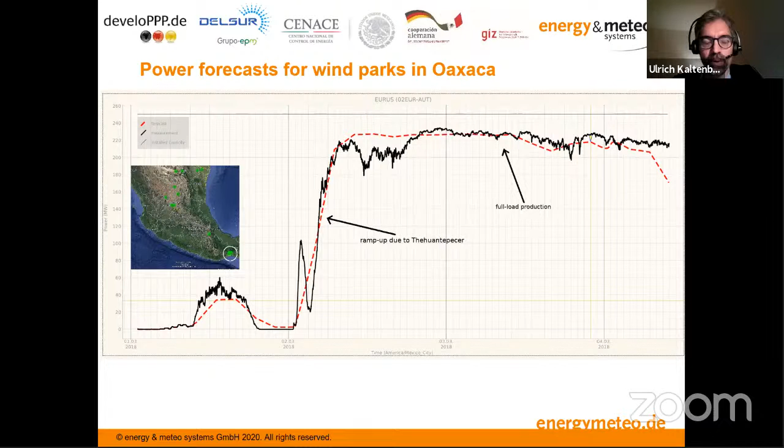Let us now come to the second topic of my presentation, the virtual power plant for distributed generation and load. I don't know if you've heard of this concept before. The VPP has emerged as a very important tool to deal with the problems or challenges deriving from the energy transition. So what the virtual power plant does, it is a software capable of aggregating distributed energy resources into one single control center. This control center is able to manage all of these units and intelligently orchestrate their operation. So the VPP connects to an unlimited number of different technologies.

It can connect to wind onshore and wind offshore plants, solar power plants, but also hydro or storage systems and even conventional generation resources. So all of these energy units can be digitally connected to a portfolio, which is then coordinated by the virtual power plant. The virtual power plant also integrates power forecasts, which is very important because in most cases we have solar and wind power plants connected to the system.

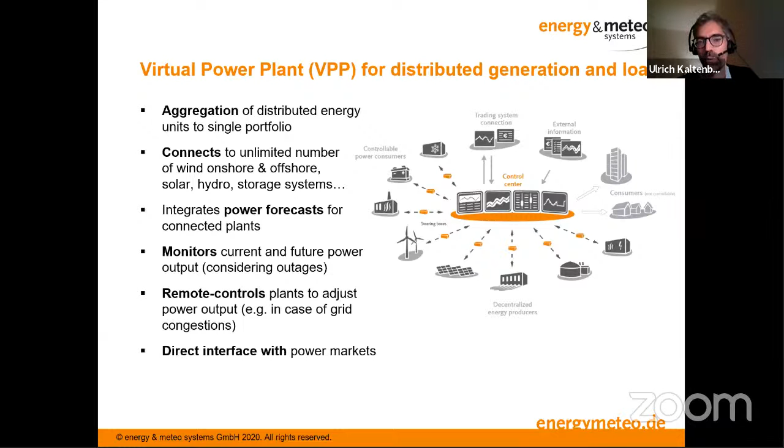For aggregators or traders, it is very interesting to have a direct interface with power markets, which is offered by the VPP. So the user of the VPP, a trader for example, is able to directly trade the production of the portfolio on short-term markets.

Before I continue with the business models and the specific use case, some charts of the virtual power plant so that you have an idea of what the virtual power plant looks like from the perspective of the user. I selected some charts which give you an idea of that.

First of all, you see here the so-called map view. This is a view of a map where all of the plants are displayed which are connected to the virtual power plant. This virtual power plant consists of a portfolio of several hundred, actually, solar and wind power plants distributed in Germany, and all of these plants are connected to this virtual power plant. As you can see here, for each power plant there is information given on the current production level at this specific moment.

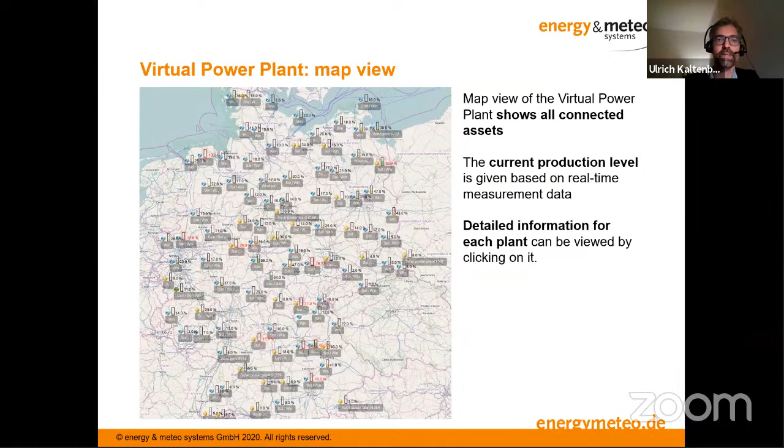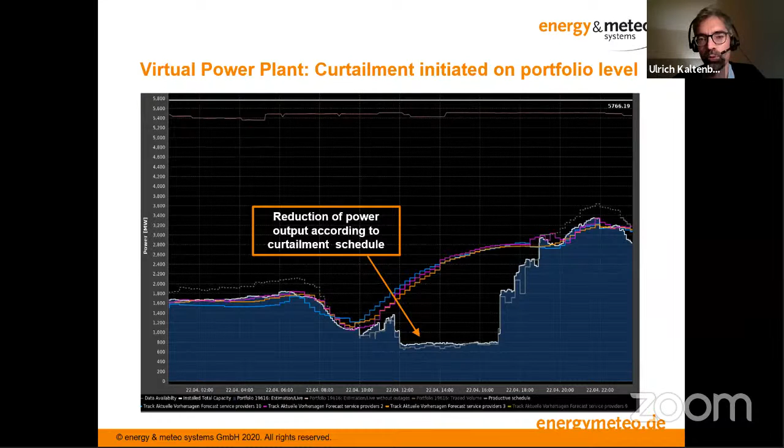But you see that here a curtailment took place, and so the user decided not to produce what would have been meteorologically possible, because if you take a look at the colored lines, this is what the power forecasts say the portfolio could generate. But for whatever reason, for example due to grid congestions or because of negative market prices, the user of the virtual power plant decided to curtail the production and reduce the power output to a capacity of 800 megawatts for a certain period. In this case, it's about 5 hours that he limits the power generation. And only after that, he permits the production of the entire portfolio to come back to what is meteorologically possible.

Let us now have a look at the different applications and business models which the VPP allows. So the VPP itself is a mere IT platform. It's up to the user to find business ideas which you can implement with the virtual power plant.

The easiest application would be to simply have a data acquisition and monitoring tool of future and current production levels. Another application would be the VPP as control center, for example for grid operators or plant operators who want to monitor and control their portfolios.

The most common use case in Germany and many European countries is trading of renewable energies on intraday and spot markets. So in Germany, you have the obligation to actively trade the generation of power plants above 100 kilowatt, and this is done by aggregators. These aggregators contract big portfolios and assume the responsibility of trading the power output on power markets, and the virtual power plant has emerged as a state-of-the-art solution for doing this.

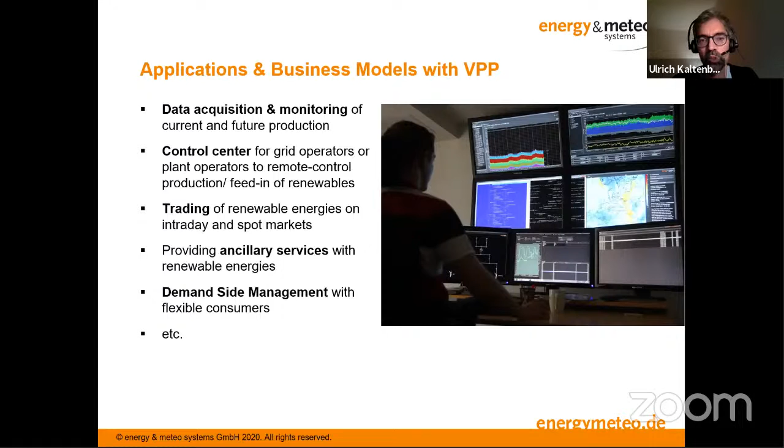Nowadays, it's also possible to provide ancillary services with renewable energies, and this can also be implemented with a virtual power plant. And last but not least, demand-side management: you can also combine flexible consumers with, for example, renewable energies and balance demand and production within one portfolio, which combines the consumer side and the supply side in one portfolio.

So let us now come to the first application, trading of wind and solar power. As I mentioned, this is the most common use case. Let's assume you have a renewable energy portfolio, which you see below, just a mixed assets portfolio consisting of solar, wind, and biogas, for example. And all of these plants are sending real-time data to the virtual power plant.

The virtual power plant conducts a real-time data plausibility check, so it checks if this information is really plausible. Then the different power forecasts are integrated, and the virtual power plant is able to carry out a so-called meta power forecast calculation. So it is able to even improve the single forecasts and combine them to create an optimized meta power forecast, which takes into account the strengths and weaknesses of each forecast provider.

What is more, non-availabilities are taken into account. This is very important: the VPP operator is not necessarily the owner of the plant. The owner of the plant is able to submit information on the availability of his plant, and this is also processed within the virtual power plant when calculating the production schedule. Then the trader knows what the production schedule of his portfolio is going to be like day ahead, and he's able to trade this power output on the energy market.

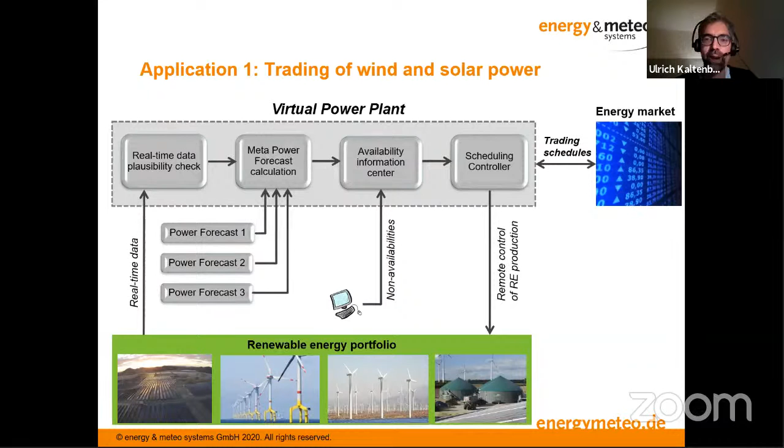I'm going to skip this slide. This explains more in detail the trading of wind and solar power.

And I come to the next application, which is providing regulation power with virtual power plants. So today, virtual power plants can also offer reserve power to the system operator, and this is already the case in Germany. For example, in Germany, wind farms are now able to participate in the reserve power market and offer tertiary reserve to the system operator.

So this shows that the VPP is very dynamic and is very quick in responding to the needs of the market and the power system, and the portfolio reacts very quickly to the order of the virtual power plant.

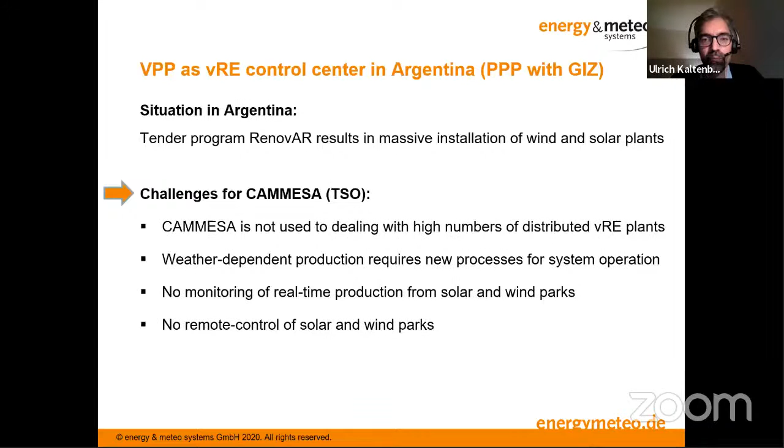In this case, we connected 27 wind parks in southern Argentina and Patagonia to the virtual power plant, and retrieve real-time information from all of these wind parks to the virtual power plant. And it's quite a lot. If you take a look, this is a total capacity of 1.5 gigawatt, and this is quite a big share of the totally installed wind power capacity in Argentina, which is 2.2 gigawatt.

And the specific challenge in this case is that many wind parks are located in Patagonia in the south of Argentina, and they are all connected to one single transmission line, and all their wind energy has to pass via a single substation. So there is tremendous pressure on the grid of CAMMESA, and the VPP in this case provides CAMMESA with much more visibility of what is really going on in Patagonia in terms of real-time production data and the future production schedule.

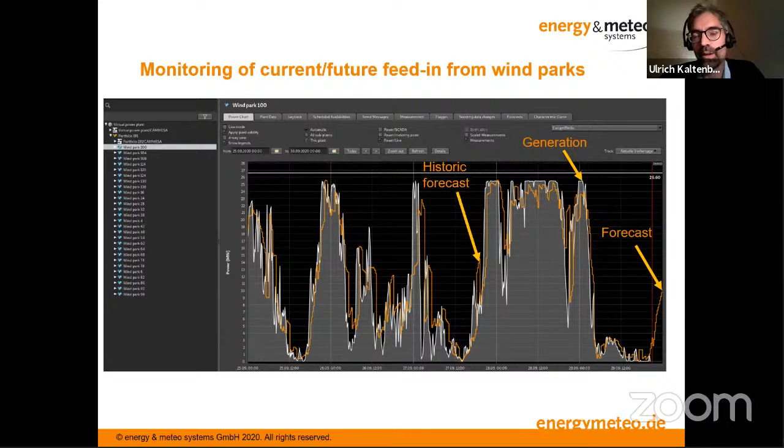Here a single wind park is selected, and you see the white line, the generation data, and the historic forecast on the left-hand side, the yellow-orange line. On the right-hand side, you see the forecast. So CAMMESA can anticipate for each single wind park, or for the entire portfolio in Patagonia, what they are doing now and what they are going to produce in the next hours or days.

This is as well the main project result so far. CAMMESA is now able to monitor current production levels of single wind parks and the entire portfolio, and sees future production levels of these wind parks. CAMMESA in principle also has the possibility to remote control the wind parks due to the regulatory framework, though it still does not really do so, but it could potentially. So this is the status quo as it currently stands.

As a next step, we agreed with CAMMESA that we will extend the forecasting service also to the solar parks in Argentina, which we are going to start in the next couple of weeks. This project will end at the end of next year, so we still have roughly one year to go with this project in Argentina.